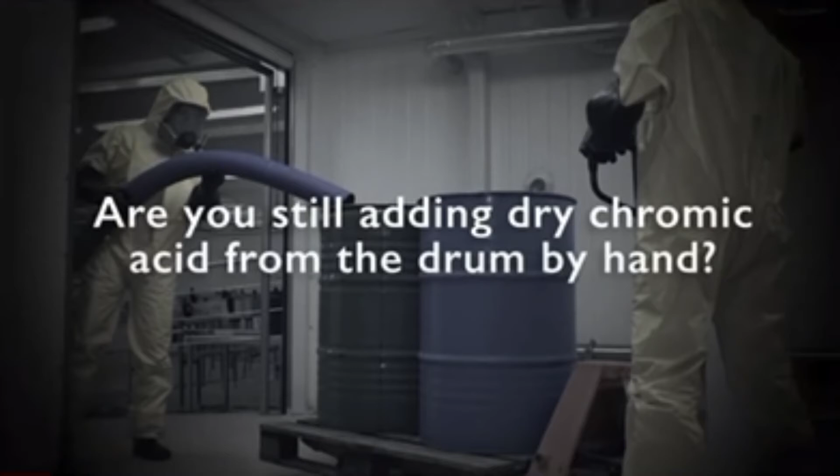Plating International, the leading supplier of chrome plating chemicals and equipment in the world, is revolutionizing the hard chrome plating process. Are you still adding dry chromic acid from the drum by hand? You could be exceeding PEL limits and potentially exposing personnel to hazardous fumes.

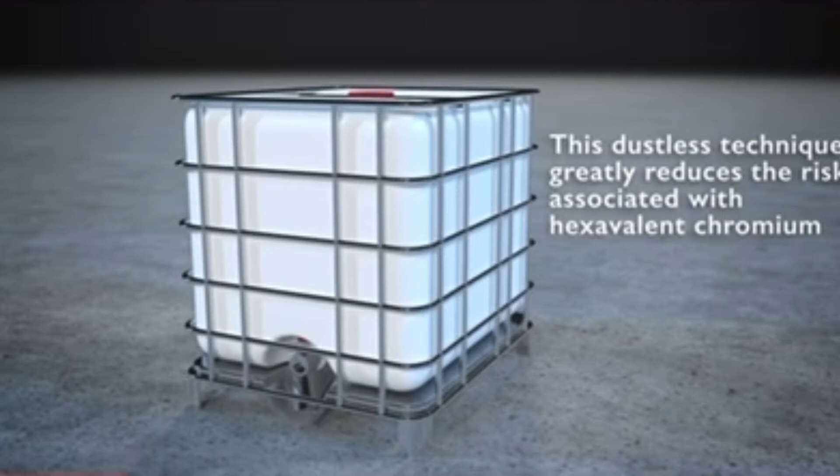Plating International's new dry IBC tote technology is the future of chrome, revolutionizing everything we know about chromic acid. This dustless technique greatly reduces the risks associated with hexavalent chromium, both from a safety and environmental perspective. It's better for your employees, better for the environment, and better for your bottom line.

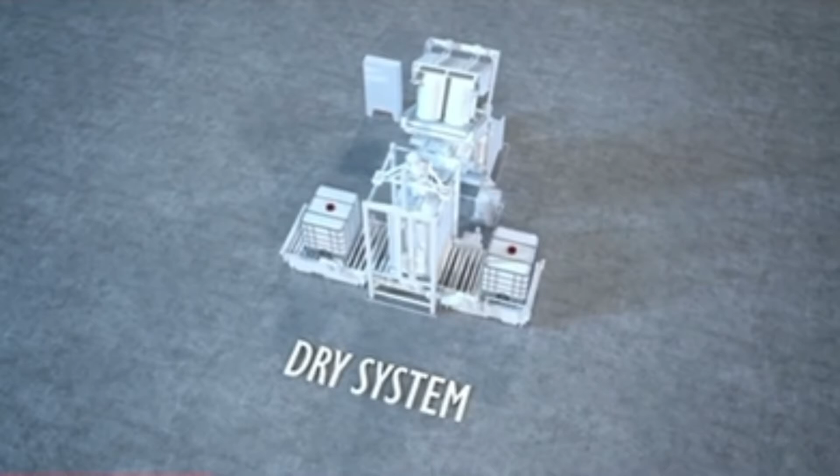Here's a look at how it works. Our process begins when we receive shipments of dry chromic acid in 250 kilogram containers. First, we use a proprietary dry repackaging system to transfer the chromic acid into a dry intermediate bulk container, or dry IBC tote. We can package these with any weight you need for your application.

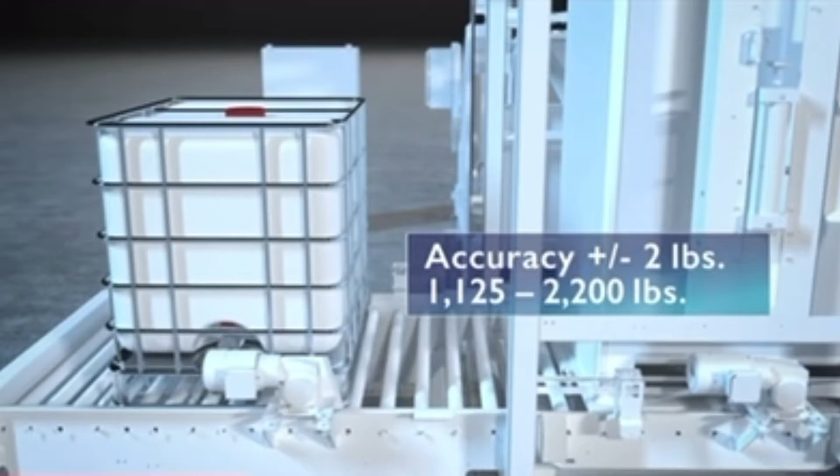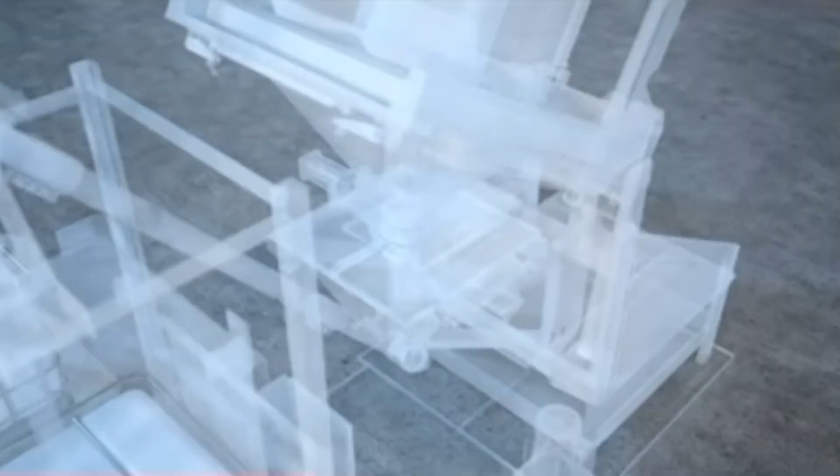The dry repackaging machine uses a hydraulic lift system to invert cans of chromic acid and empty them into a large loading hopper. The empty tote gets moved into the filling station, and the filling head is lowered into the dry IBC tote. Then, the loading hopper uses a screw conveyor to automatically feed the desired amount of material into the dry IBC tote.

Throughout this part of the process, we use a ventilation system to ensure no employees are exposed to the hazardous chemicals. And we use a HEPA filter, so none of the hazardous chemicals make it into the outside air.

Now, the filled dry IBC tote can be used to safely manufacture liquid chromic acid. We can ship the tote to you like this, or use the next stage of our innovative manufacturing process to do the blending for you.

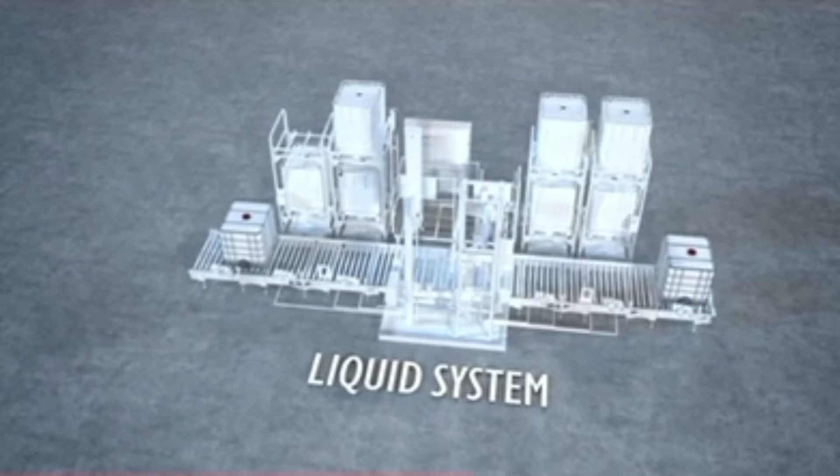The next step is the liquid filling line. Here, our system automatically moves totes to the water filling station and uses a proprietary filling method to add the desired amount of deionized water to the mixture to create any concentration of chromic acid. In less than 3 minutes, the liquid filling process is complete.

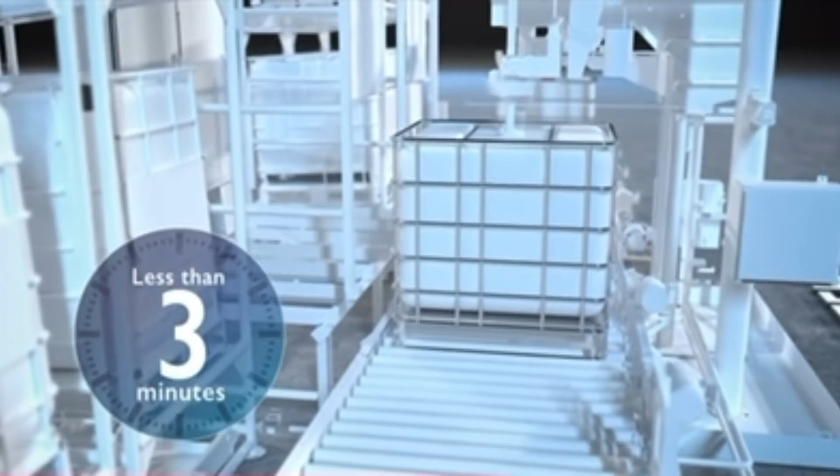The tote moves to the next step, the mixing station. Here, we can mix the chrome and water. Or we add additional chemicals to the tote and mix after each component is added. This is how we create complex proprietary blends, customized for your needs.

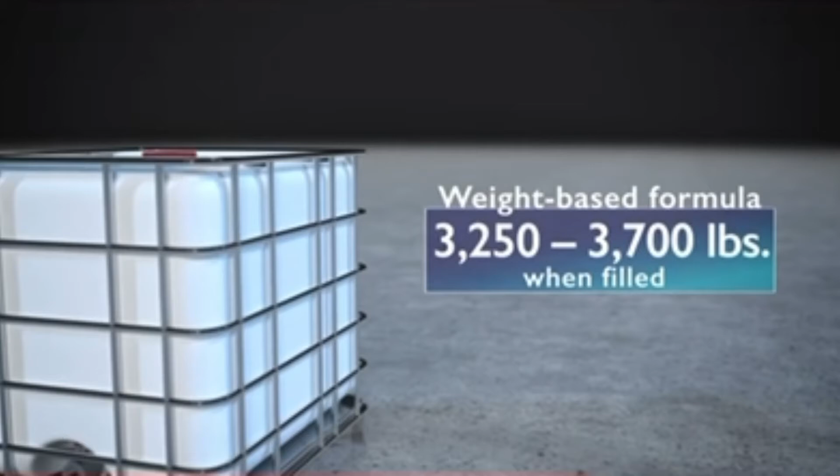We use a weight-based formula to add each product and record each formula after the product is added. This helps us maintain strict control over the quality of each tote we manufacture and each chemical within that tote, so we can ensure identical reproduction of each tote.

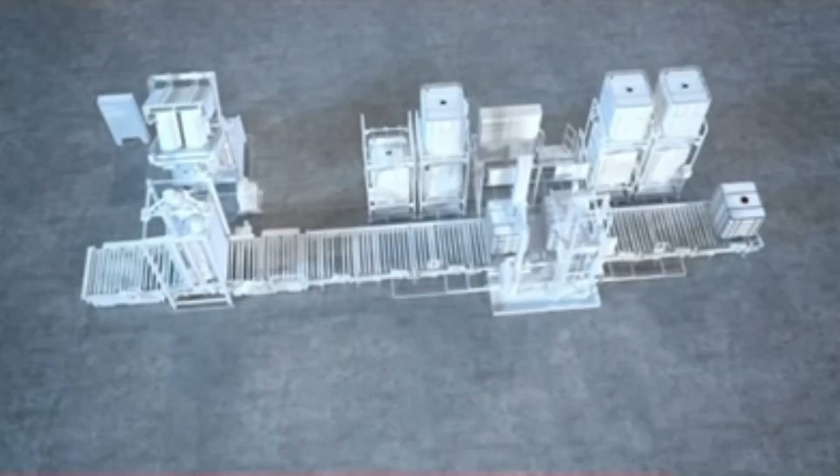We sample every tote for quality control before we ship it to you. Our quality control rate is 100%. We generally manufacture each blended tote in 5 to 10 minutes. With this innovative technology, we can process a truckload of liquid chromic acid in under an hour.

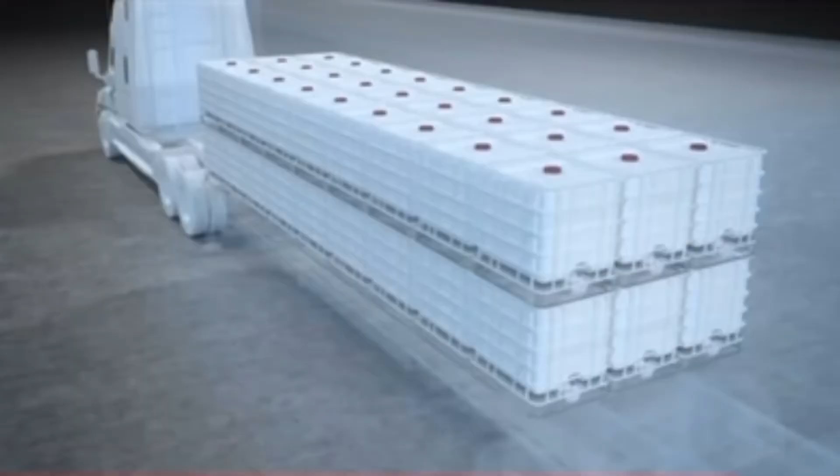We can also ship you dry IBC totes filled only with powdered chemicals for you to create a finished liquid blend in your own facility. There are numerous benefits to buying dry IBC totes, and you get all of the savings and efficiencies for about the same price as a traditional drum of chromic acid.

The new dry IBC tote process is just one way Plating International is moving the chrome plating industry forward. Contact us today to learn what Plating International can do for your operation.

Bob's having one of those days. His old SCR rectifier's acting up again, which means this batch is scrap, and he's shut down again until the big beast gets fixed. This means wasted time and wasted money.

That's because hard chrome platers like Bob don't really call the shots, their rectifiers do. Which is frustrating, considering: 1, how much they cost; 2, how much they cost to operate; and 3, how much space they take up. Here's news Bob is going to love. He doesn't have to put up with his old SCR rectifier ever again, because there's a better way.

Plating International presents the FlexCraft Switch Mode Rectifier. Here's how the FlexCraft Switch Mode Rectifier stacks up against Bob's old SCR.

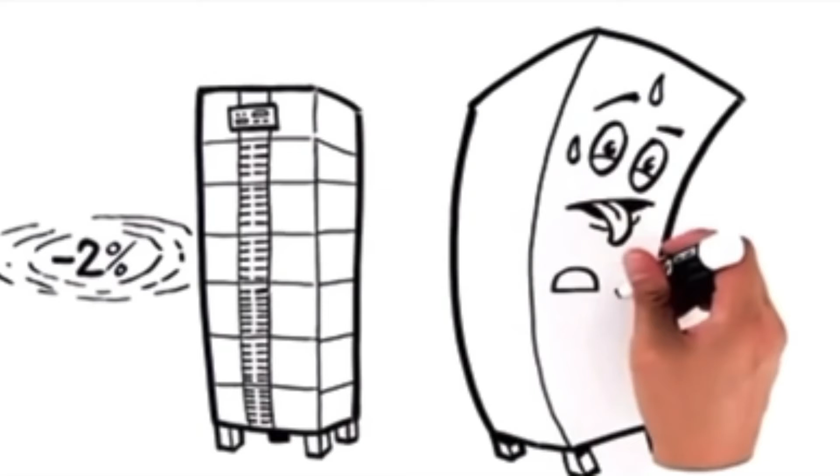Because Bob is a hard chrome applicator, he appreciates the extremely low ripple, less than 2%, compared with his SCR that requires a costly ripple filter. Switch Mode technology is vastly more efficient, with nearly 90% efficiency across its entire output range of 0 to 60 volts and 0 to 24,000 amps.

Bob can save around 25% on his electric bill. Additionally, if Bob needed internal reverse, the FlexCraft costs 35% less than a traditional SCR with pole reverse.

Need more amperage later? No problem. More units can be stacked on.

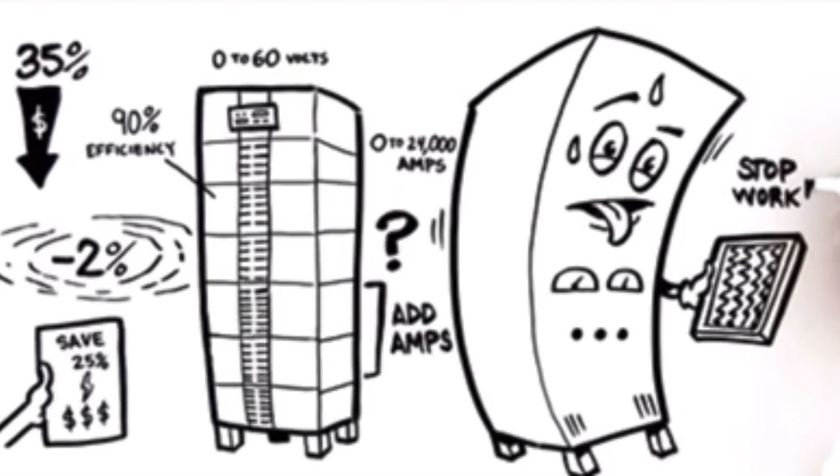Then there's maintenance and size. When Bob's SCR goes down, work stops. Not with the FlexCraft. It's uniform, modular, and self-diagnoses issues. If one module fails, the unit continues, running at reduced power, minimizing downtime. And the footprint? The FlexCraft is about half the size of the SCR.

Bob's ready to pull the plug on his old SCR, save money, and make the switch. How about you? See how the FlexCraft switch mode rectifier stacks up at www.platinginternational.com/rectifiers.